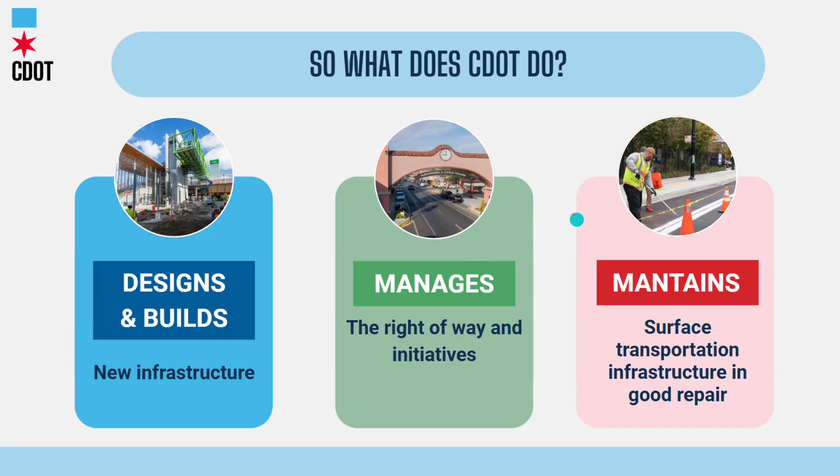A little about the designing and building that we do. On your screen you have a list of the different things we design and build, like trails, streetscapes, and train stations, which I wanted to point out is something we work very closely on with the Chicago Transit Authority, who manages our public transit system. But since the train stations are in the right of way, that falls under CDOT as well, so we can also design and manage those projects.

The Green Line Damen Station is one example of a station that was recently completed. Right now we're working on another station at State and Lake, which you've probably heard about, and we'll also provide updates on that later today.

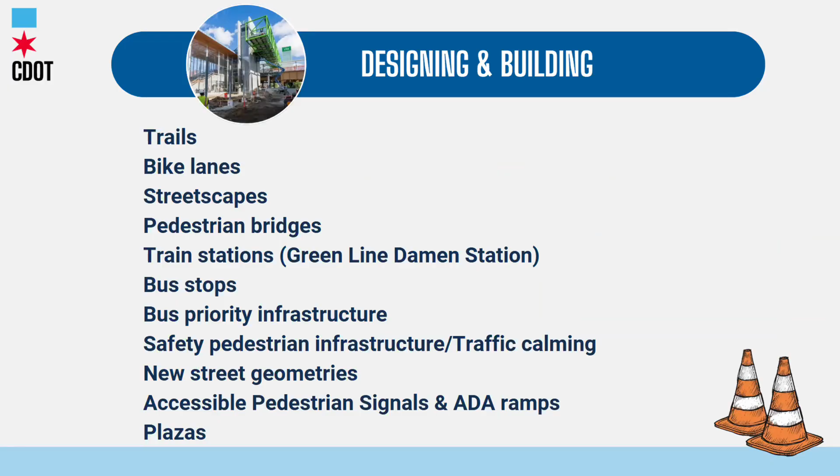That's a list of the projects that we build. But did you also know that we also build safe pedestrian infrastructure around schools? CDOT is implementing a comprehensive neighborhood-level effort surrounding schools by building complementary safety improvements to create a better, more walkable environment. CDOT has implemented this strategy in 10 schools, and we're hoping to increase that number moving forward. Schools selected for improvements are based on crash data, community input, and street context for greater impact.

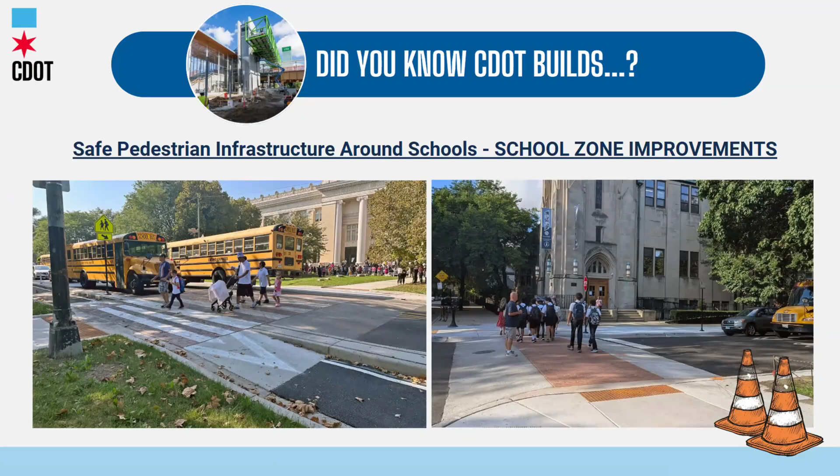Some of the infrastructure highlights included in these projects are curb bump-outs, raised crosswalks, and refuge islands. Once this presentation is shared on our website, you'll be able to click on the link that will redirect you to our page, where there's a map with a comprehensive overview of each of the school locations, so you get a better idea of where we're working to improve safety around schools.

So managing the right of way is another of our functions as CDOT. One of the department's key responsibilities is to manage the right of way. CDOT enforces regulations for construction in the public right of way, including permitting and use of the public way, utility coordination, excavation oversight, and public way construction rules and coordination.

On your screen, we have a few other examples of what the department manages, things like traffic lights, clean transportation, micromobility, transportation policy, street signs, our pedway, and also our waterways through the harbors, the Chicago River, and any of its tributaries.

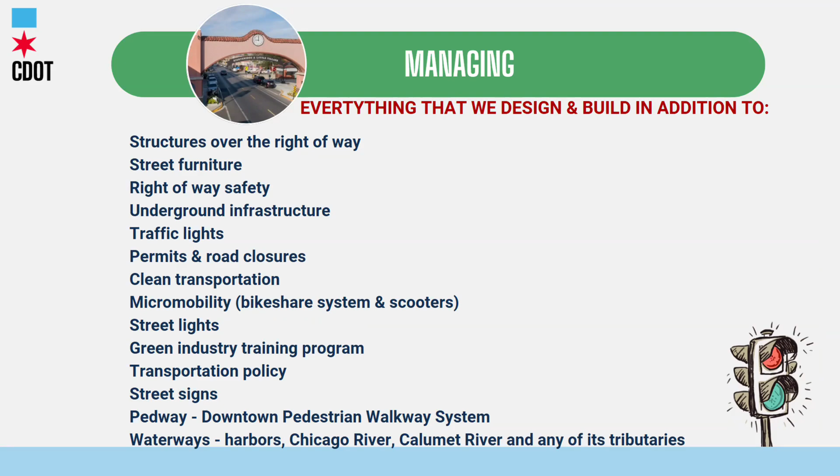Did you know that we also manage the City of Chicago's Green Industry Job Training Program, known as Greencorps Chicago? This is the City's Green Industry Employment Program with on-the-job training for individuals with barriers to employment. Green Corp Chicago promotes environmental stewardship and improves quality of life by establishing, maintaining, and restoring natural and public spaces that are safe, healthy, and sustainable. The outcome is healthier, safer, more engaged communities and individuals prepared for employment through practical field experience. Green Corp Chicago is a public-private partnership between the Chicago Department of Transportation and WRD Environmental.

If you click on this website, right now we're in the process of hiring. The application is open for individuals interested in participating in this green industry job training program, so just wanted to point that out.

Maintaining: CDOT maintains surface infrastructure in a state of good repair to be functional and serve the public as intended. Some of what CDOT maintains includes our bridges, street signs, alleys, sidewalks, and landscape medians. Something not everybody knows - you might see a plate that says CDOT, and that indicates a space we maintain in the right of way. These are the medians usually downtown with tulips, beautiful flowers during spring and early summer. There are also medians with full-grown trees in different parts of the city. Another green space that we maintain is historic boulevards.

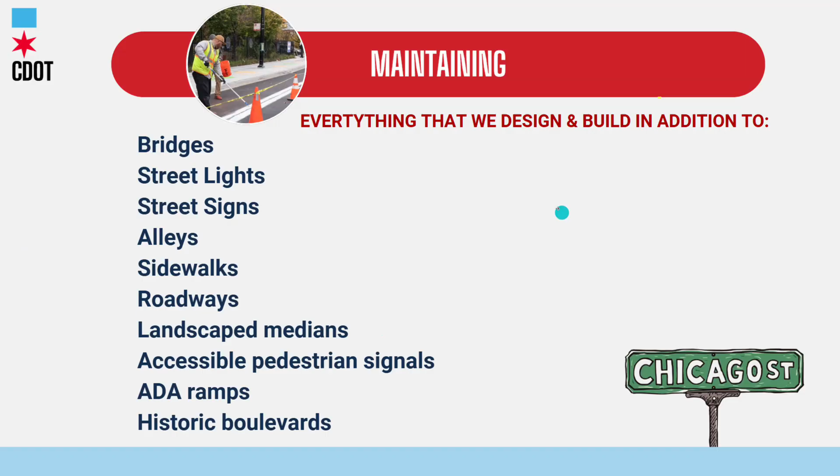Did you know that CDOT is responsible for more than 300 bridges and viaduct structures, including 37 movable bridges along the Chicago and Calumet rivers? Something I personally found very interesting when I learned this is that our commissioner, the Department of Transportation, is also the harbor master of the City of Chicago. CDOT has jurisdiction over the Lake Michigan harbors, the Chicago River, the Calumet River, and any of its tributaries. I think that's a much better title for the commissioner - I really like it.

CDOT works with the Chicago Park District, the U.S. Army Corps of Engineers, and Illinois Department of Natural Resources to reconstruct deteriorated revetment structures along the Lake Michigan shoreline. So just to be clear, we manage the infrastructure along the shoreline of Lake Michigan.

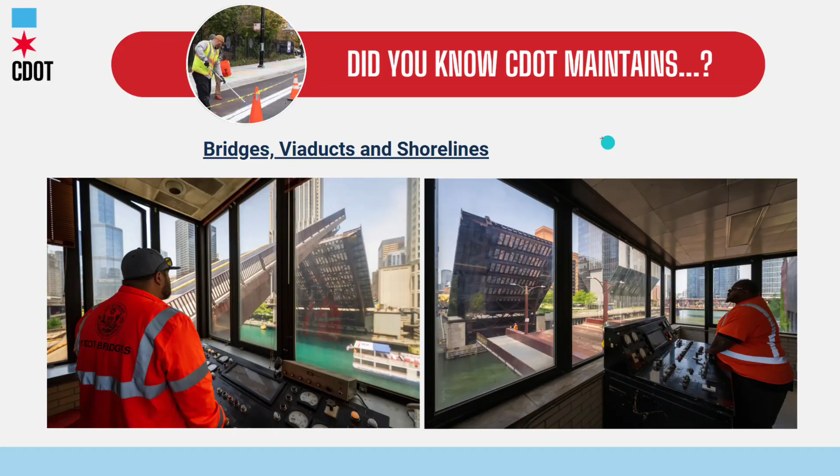So we're getting to the end of this first section. Something we don't do as a department - we wanted to clarify a few things. It takes many resources to run a city and provide needed resources in a timely manner. This is one reason why there are multiple departments and agencies overseeing different functions and services. CDOT collaborates closely across city departments to complete projects and advance efforts. So it's understandable if there's confusion on specific initiatives or services that might seem to be under CDOT's jurisdiction but in fact fall under the responsibilities of other departments.

Another example is managing the snow plows. Snow clearing on our streets falls under the Department of Streets and Sanitation - they are the ones that operate that service. I also wanted to provide clarification here, because this is where it starts getting confusing. Streets and Sanitation clears our streets and roads of snow. But CDOT, the Department of Transportation, is responsible for clearing snow from protected bike lanes. That's done in very close coordination with Streets and Sanitation, but we operate the smaller snow blowers on our protected bike lanes.

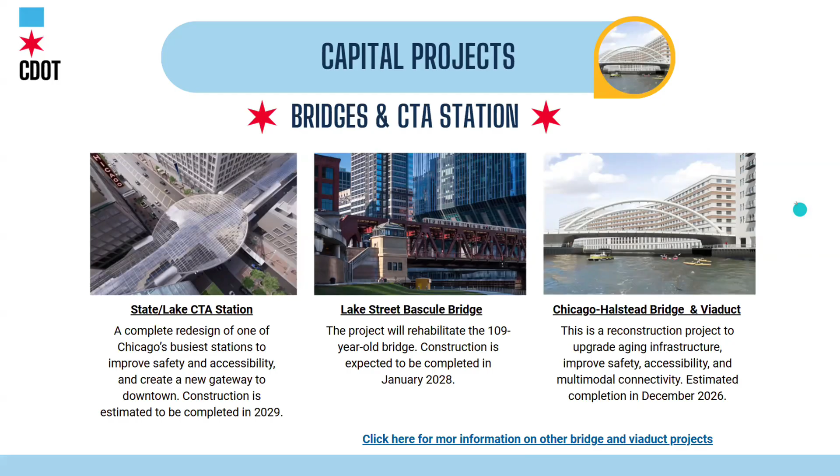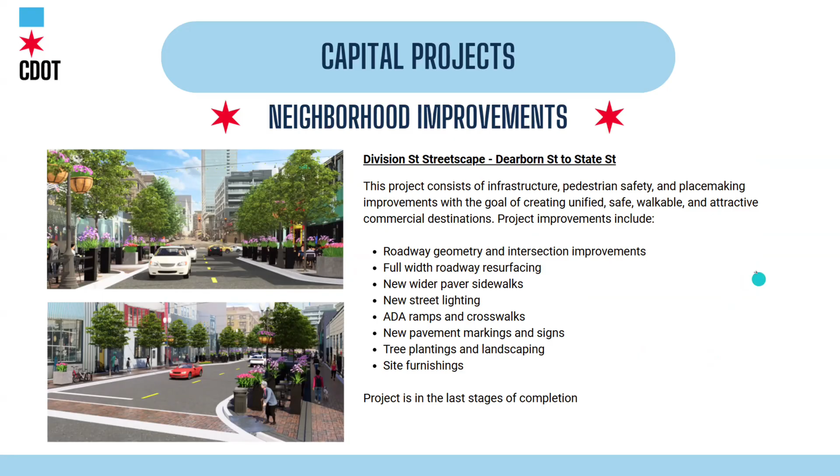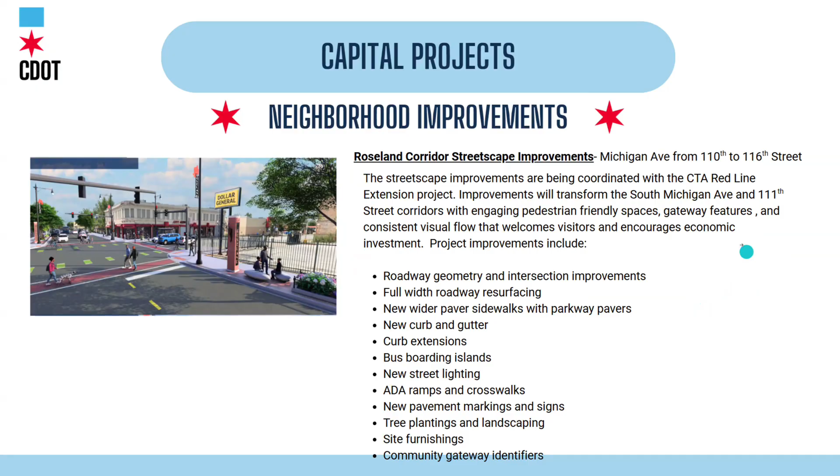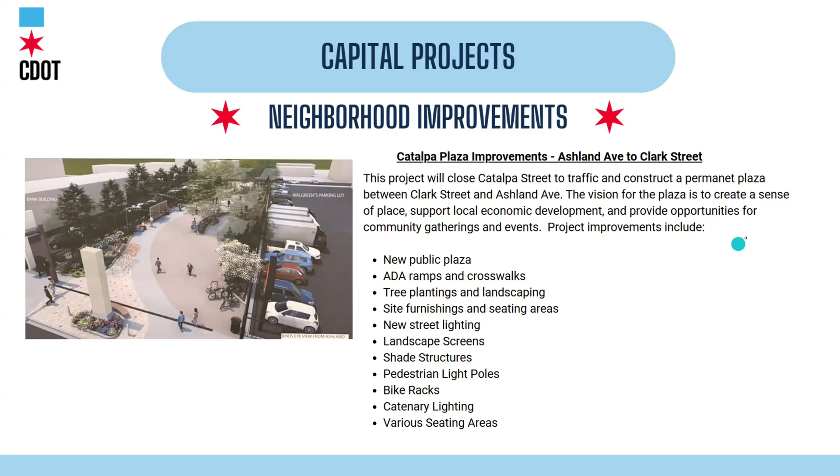And another one, which is very interesting, is a different type of project than what we usually see from CDOT—a plaza improvement between Ashland and Clark. This project will close Catalpa Street to traffic and construct a permanent plaza between Clark Street and Ashland Avenue. The vision for this plaza is to create a sense of place, support the local economy, and provide opportunities for community gatherings. Improvements will include pedestrian light poles, bike racks, seating areas, furnishing, tree plantings, and so forth. So this would be very interesting.

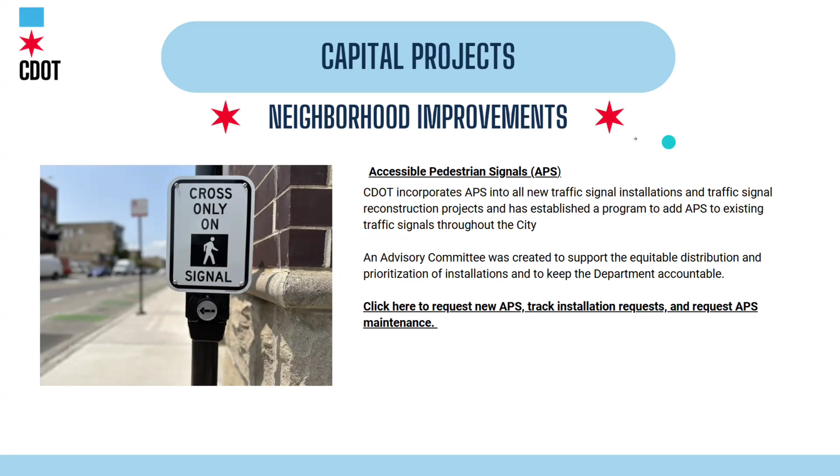Alrighty, so this is when I get to sit back a little bit, and we'll hear from Kyle on some highlights regarding shared micromobility.

Thanks, Romina. Yes, you've been talking a lot, so I'm glad. Take a sip of water. Glad to take over for a little while.

I am Kyle Pepin, coordinating planner for micromobility. We manage CDOT's infrastructure around shared micromobility, namely the city-owned Divvy system. We also provide other services like bike rack installation, the Bike Chicago program, and we monitor Lime's scooters in the city of Chicago. They are a private business operating under a license.

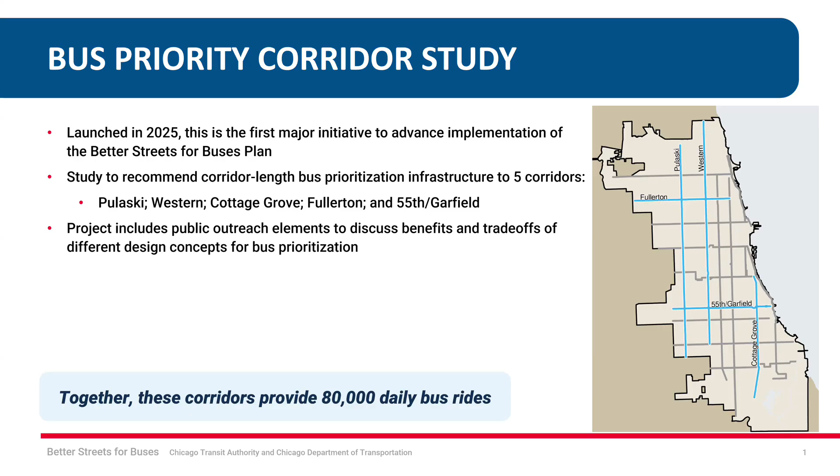From these 17 corridors, we identified 5, shown in blue, to study first in order to develop design concepts. These concepts will then be used to seek funding for implementation. Just these 5 corridors alone provide 80,000 daily bus rides, which is one reason why they were chosen first, but also a combination of factors including broad geographic coverage, ridership, and public support expressed during the development of the Better Streets for Buses plan.

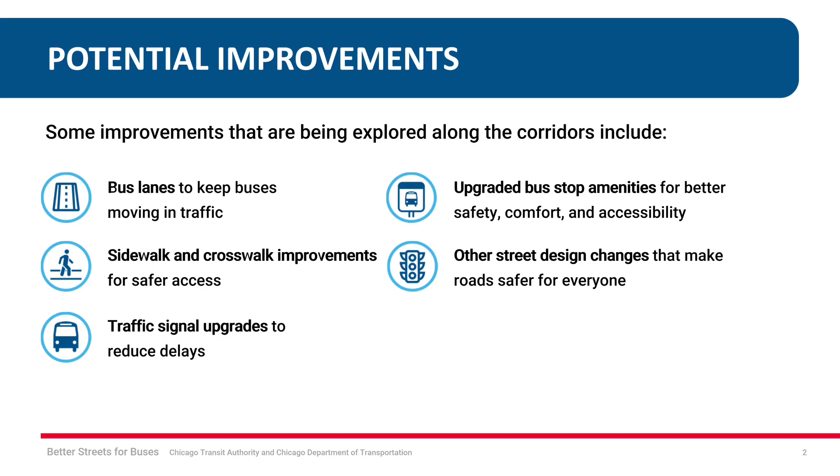It's really about rethinking the streets entirely to support faster, more reliable bus service. So the outcomes we're looking for with this study are developing recommended design alternatives for each corridor that reflect community feedback and can be advanced further. Recommendations can vary by corridor and location, and also in how robust they are, ranging up to BRT, or bus rapid transit style designs, or a more limited selection of bus priority features such as curbside lanes or bus bulbs, boarding islands, and signal improvements.

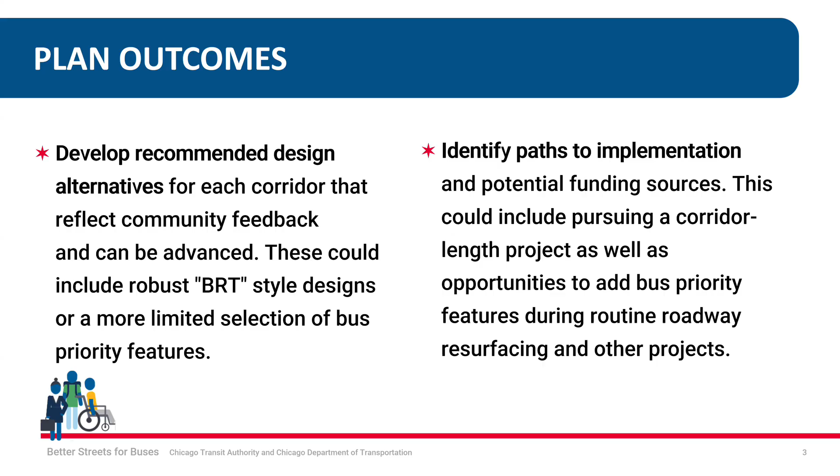The project scope also includes identifying paths to implementation and potential funding sources. This could include pursuing corridor-length projects end to end, as well as opportunities to add bus priority features during routine roadway resurfacing and other CDOT projects, such as streetscape work and even bike infrastructure work. Incorporating bus priority elements into projects that are happening anyway could have little or no marginal cost to a project that's already funded through other means. It's just a matter of allocating the space and design to prioritize buses.

So for public outreach, we're currently wrapping up the first of 3 planned rounds for this project. Hopefully some of you were able to engage already, and if not, there's still a chance during this first round right now, which I'll get to in a little while. During this first round, we're gathering community input on early design concepts, and the main goal is to better understand how residents and different communities view the trade-offs involved in bus priority infrastructure, like the potential reduction of street parking in exchange for more reliable bus service, or perhaps reallocation of a travel lane for a bus lane.

After incorporating all the public feedback we receive, along with some initial traffic modeling analysis, we'll come back to the community this fall and share refined design concepts and do another round of community feedback to gather input on what works best in different communities. The designs we share at that point will reflect what we've heard during this round of engagement. Then in early 2027, after incorporating what we hear in the second round, we'll publicly share the final recommendations.

I'll share an example in a moment, but before getting to that, the way we're framing it now is to consider how each concept alternative impacts street design priorities such as bus speed and reliability, pedestrian experience and safety, experience at the bus stop waiting for the bus, access for turning onto cross streets, number of travel lanes for cars, and street parking impacts as well.

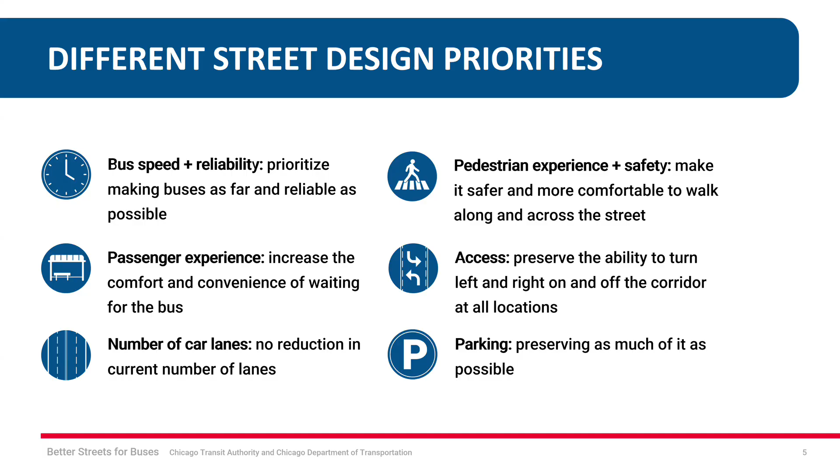So the type of bus priority treatments possible at a given location, through the lens of this project, is largely based on how wide the street is. We're talking about the curb to curb width. We all know that sidewalk space is very precious, and in Chicago, most of the right of way is built up to the private property.

So rather than talking about widening roads for long stretches, each street was categorized by its existing curb to curb width, and design concepts were developed to show the range of possible concepts available at different widths. As you can imagine, there's a lot more options and things we can do where there's a much wider section than in the more narrow areas.

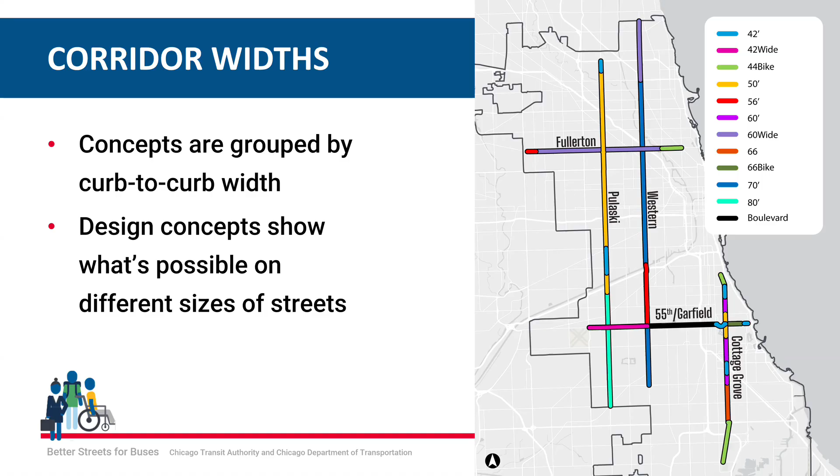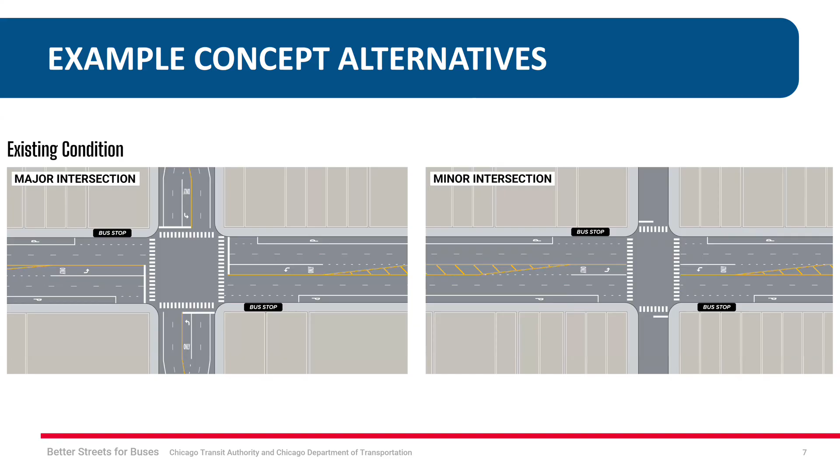So here's an example of the different types of alternatives we're looking into and gathering feedback on. This example shows concepts that would fit on a 70-foot curb-to-curb section as the existing condition. Options at this width could include center running configurations, curbside bus lanes, which repurpose parking, and offset bus lanes, which repurpose a general travel lane.

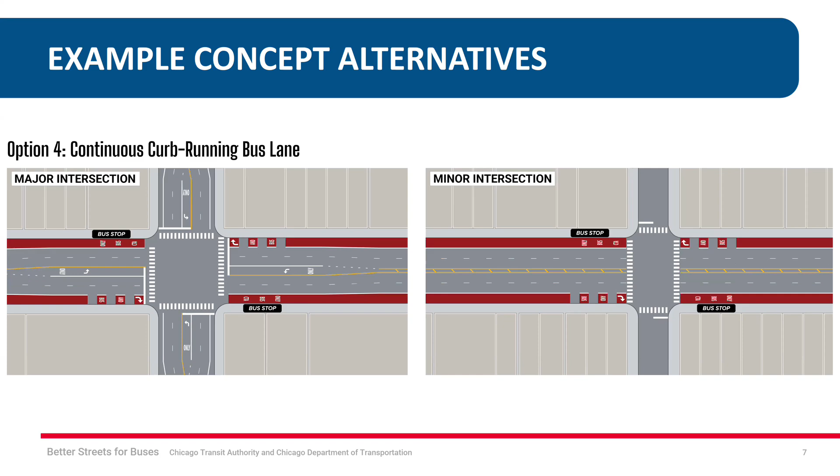On the detailed materials posted to the project website, you can see versions of these types of concepts for each width that substantially occurs on all 5 of the corridors, along with the relative impacts of each design in the main categories we talked about earlier, such as parking impacts, general traffic impacts, etc.

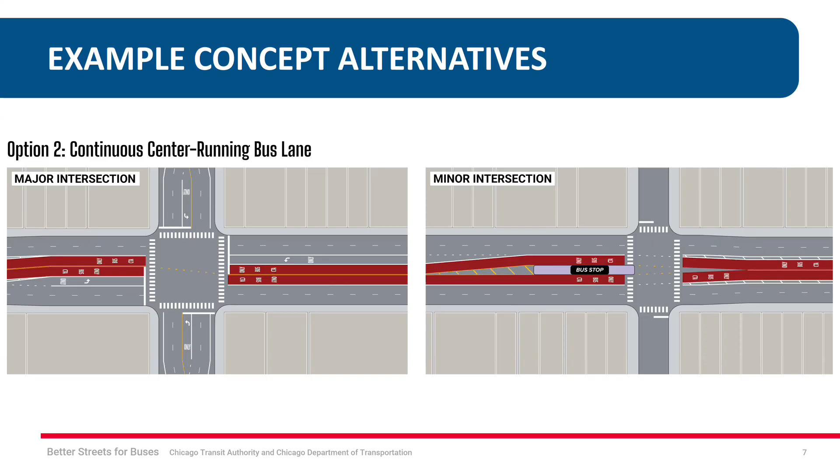So to wrap it up, here's the part where you can get involved. At the public meetings we held last November and December, over 120 people attended an in-person meeting, and almost 160 joined the virtual public meeting that we had.

However, for anyone that wasn't able to join, we have posted all the meeting materials, including the concepts and proposed alternatives for all 5 corridors, and posted a recording of the entire virtual public meeting as well.

Finally, we created a Menti activity and survey on the project website for anyone to provide project feedback. The Menti includes a more detailed version of the information I just covered, and is designed to be taken by anyone, even if they have not reviewed other materials or listened to a presentation or one of the public meetings, but it can also be a way for those who have already engaged to provide additional feedback.

The survey will be open through the end of this month. At that time, when it closes, we'll incorporate all the feedback received thus far through the public meetings, focus groups, and the online feedback, and dive into traffic analysis on the preferred concepts.

So be sure to visit transitchicago.com/betterstreetsforbuses, hashtag corridor. I know that's a lot, but we can share that via email. We'd also like to ask you guys to spread the word to your networks about doing this Menti activity online and getting into the meeting materials, because we really want to hear from as many voices as possible to make this project successful. All the materials on the website and in the survey are in English and Spanish.